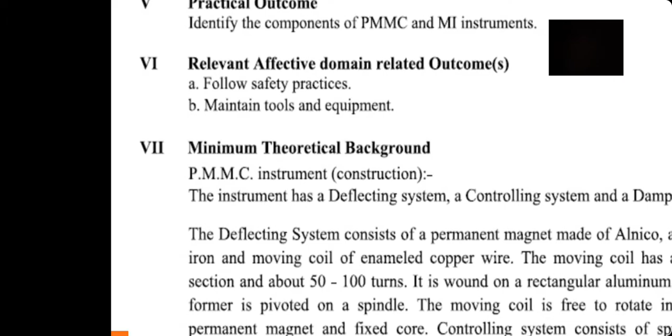Relevant affective domain related outcomes: follow safety practices, maintain tools and equipment. Minimum theoretical background for this practical: PMMC instrument construction. The instrument has a deflecting system, controlling system and damping system.

The deflecting system consists of a permanent magnet made of alnico, a core of soft iron and a moving coil of enameled copper wire. Okay, the deflecting system consists of a permanent magnet made of alnico, a core of soft iron and a moving coil of enameled copper wire. The moving coil has a thin cross section and about 50 to 100 turns.

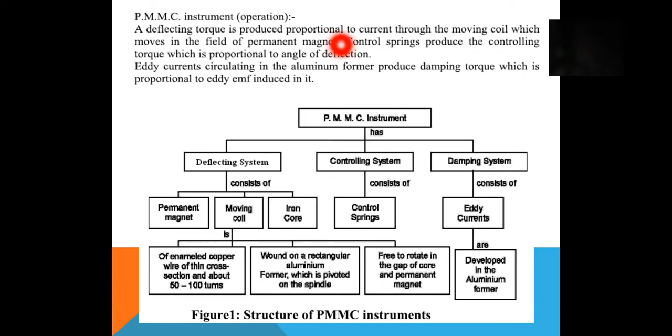Okay, this is the minimum theoretical background for the permanent magnet moving coil instrument. Now, permanent magnet moving coil instrument operation: a deflecting torque is produced proportional to the current through the moving coil, which moves in the field of the permanent magnet.

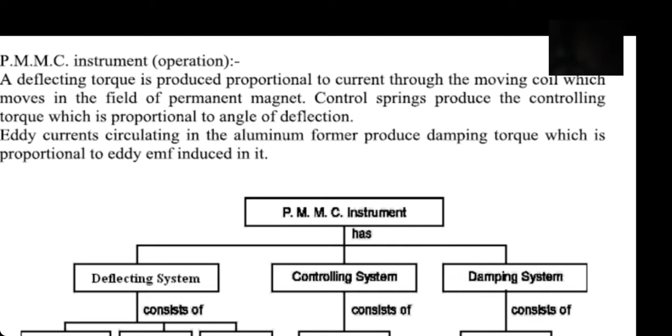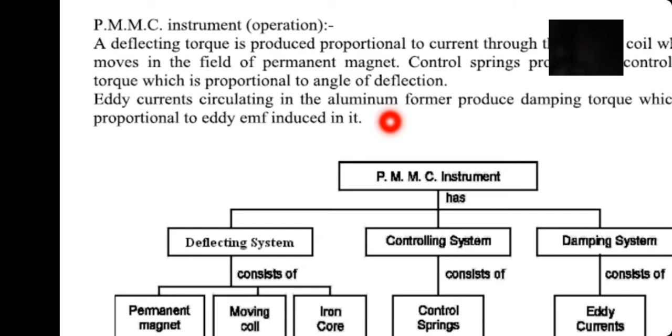Control springs produce the controlling torque, which is proportional to the angle of deflection. Eddy currents circulating in the aluminum former produce damping torque, which is proportional to the eddy EMF induced in it. Okay, this is the permanent magnet moving coil instrument having deflecting system, controlling system and damping system.

The deflecting system consists of three components: permanent magnet, moving coil, and iron core. In the controlling system, the control spring component is included. The damping system consists of eddy currents.

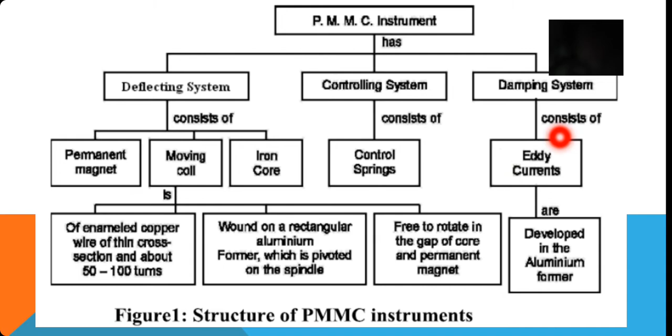Again, the moving coil is of enameled copper wire of thin cross section and about 50 to 100 turns, wound on a rectangular aluminum former which is pivoted on the spindle, free to rotate in the gap of core and permanent magnet. And eddy currents are developed in the aluminum former. Figure 1, structure of PMMC instrument.

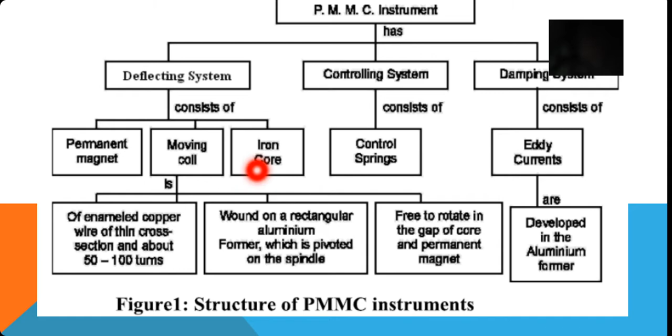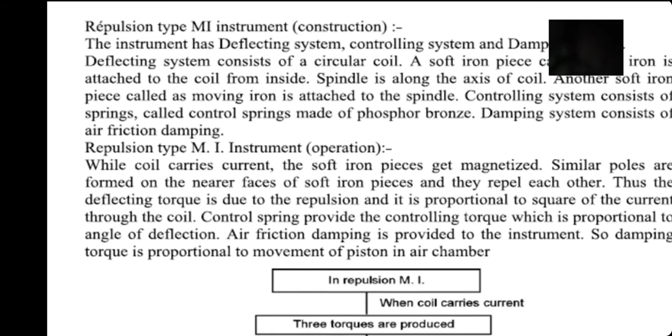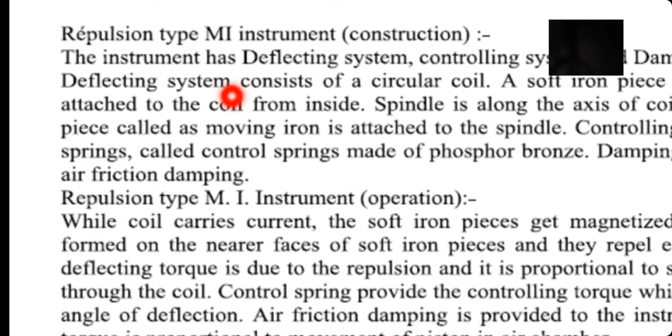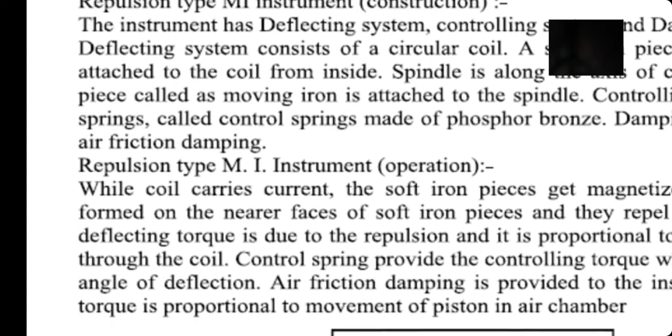Repulsion type MI instrument. Okay, repulsion type MI instruments construction. The instrument has deflecting system, controlling system and damping system. Deflecting system consists of a circular coil. A soft iron piece called fixed iron is attached to the coil from inside. Spindle is along the axis of coil. Another soft iron piece called as moving iron is attached to the spindle.

Controlling system consists of spring called control spring made of phosphor bronze. Damping system consists of air friction damping. Repulsion type MI instruments operation. While coil carries current, the soft iron pieces get magnetized. Similar poles are formed on the nearer faces of soft iron pieces and they repel each other.

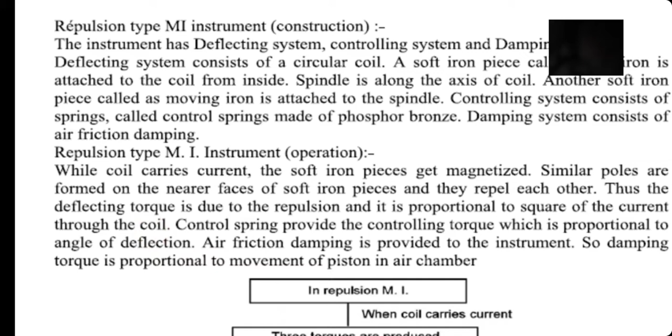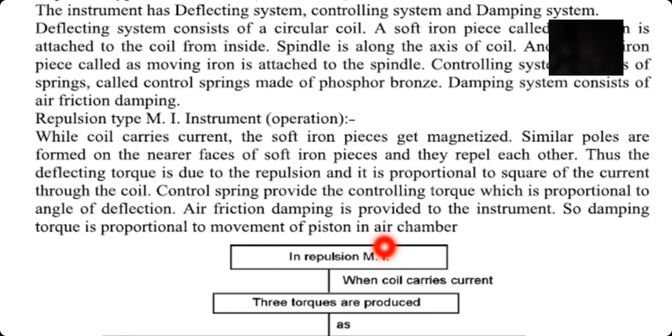Thus, the deflecting torque is due to the repulsion and it is proportional to square of the current through the coil. Okay. Control spring provides the controlling torque which is proportional to angle of deflection. Air friction damping is provided to the instrument, so damping torque is proportional to movement of piston in the chamber. Okay.

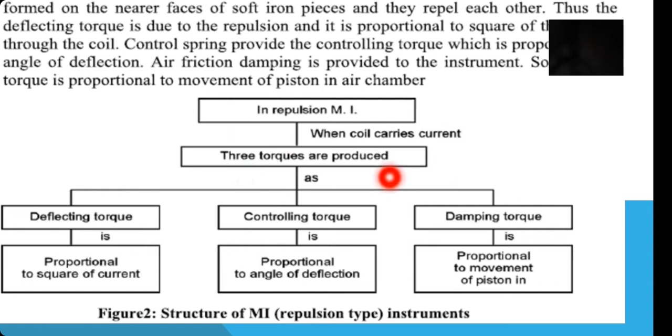In repulsion MI, when coil carries current, then three torques are produced as deflecting torque, controlling torque, damping torque. Okay. Now deflecting torque is proportional to square of the current. Controlling torque is proportional to angle of deflection. Damping torque is proportional to movement of piston in chamber.

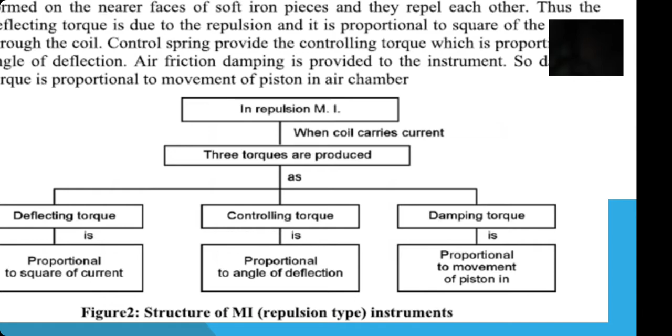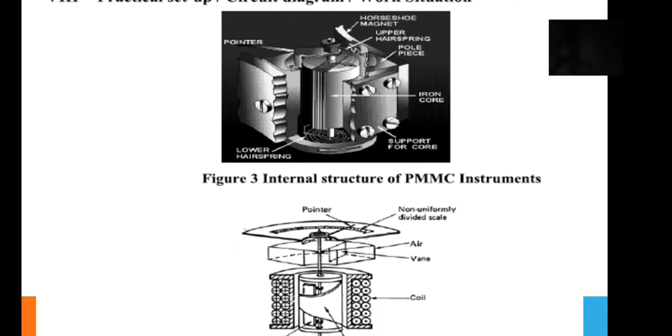Okay, figure 2, structure of moving iron repulsion type instrument. We can see here practical setup, circuit diagram, work situation. Okay, figure 3, internal structure of PMMC instruments.

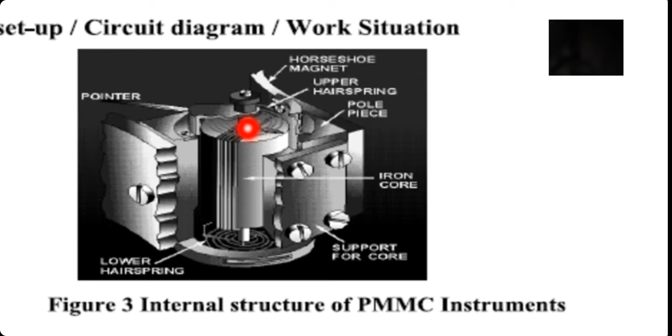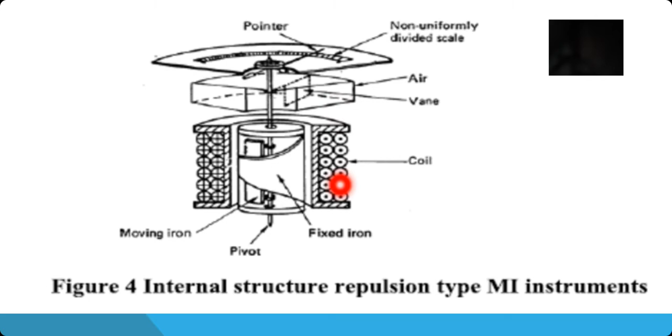Non-uniformly divided scale. This is the non-uniformly divided scale. Air vane to produce damping torque. Coil, okay, coil is wound and iron is moving in MI instrument. Okay.

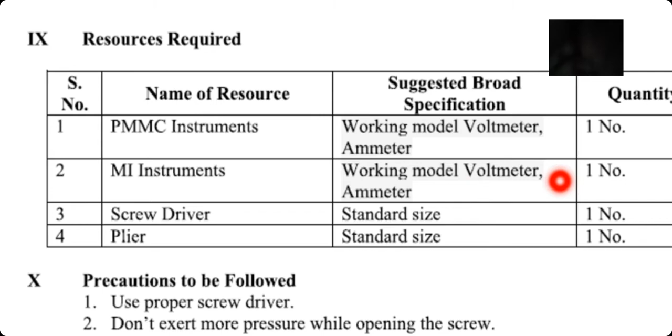Now conducting for this practical, resources required: PMMC instruments working model voltmeter ammeter quantity 1, MI instruments working model voltmeter ammeter quantity 1, screwdriver standard size, plier standard size number 1. Precautions to be followed: use a proper screwdriver, don't exert more pressure while opening the screw.

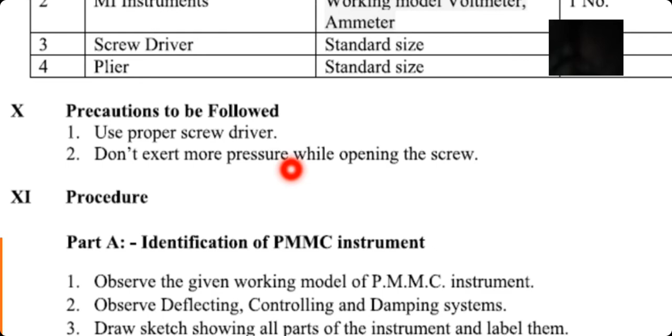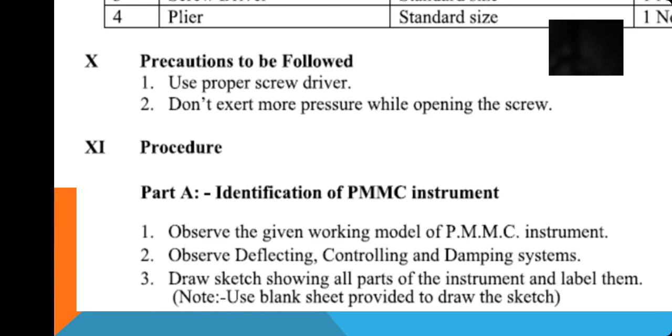Okay, procedure. Part A, identification of permanent magnet moving coil instrument. Observe the given working model of PMMC instruments. Observe deflecting, controlling and damping system. Draw sketch showing all parts of the instruments and label them. Note, use blank sheet provided to draw the sketch. Okay, this is the procedure of part A, identification of permanent magnet moving coil instrument, PMMC instruments.

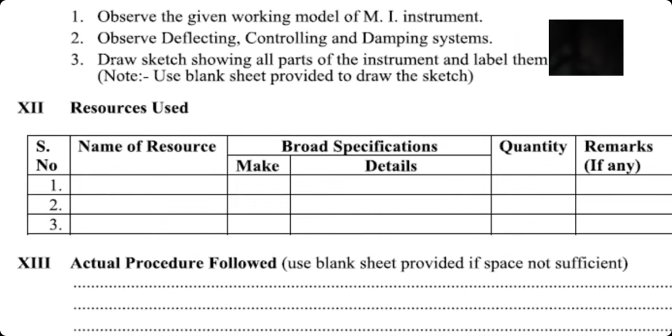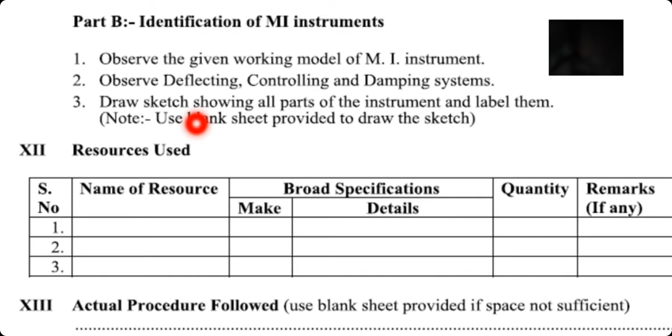Okay, and this is the part B of practical, identification of MI instrument. Observe the given working model of MI instrument. Observe deflecting, controlling and damping system. Draw sketch showing all parts of the instruments and label them. Okay, here is the resources used.

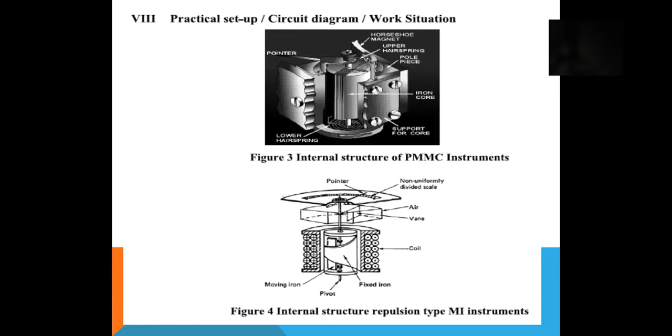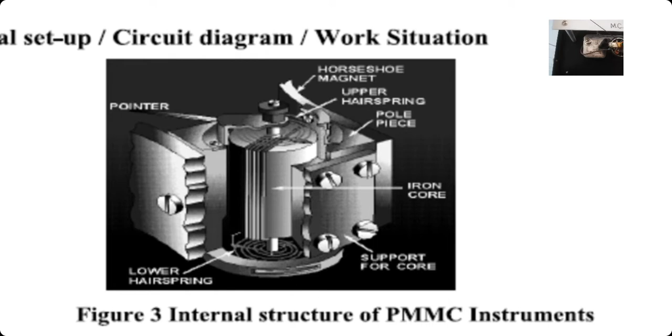Internal structure of PMMC instrument and internal structure of MI instruments we are going to see, and we are going to identify the components of PMMC and MI instruments. Okay. I have one PMMC instrument, a voltmeter. I am going to show you, see in the video. Okay.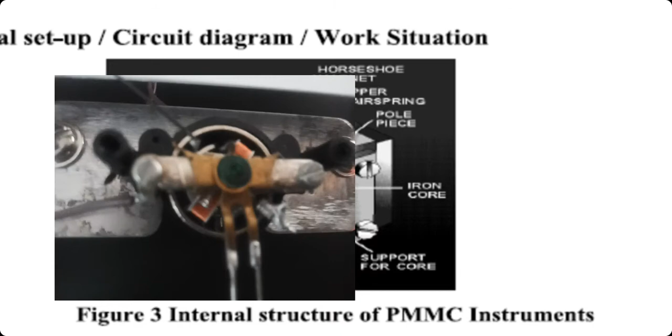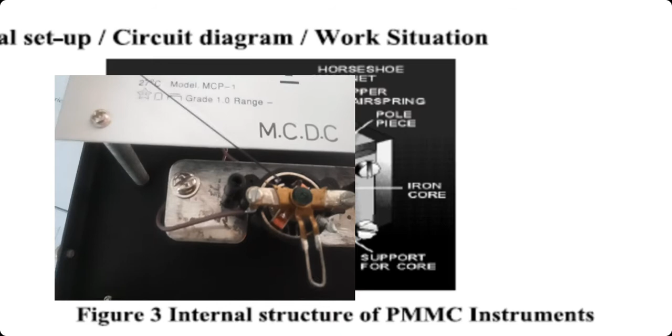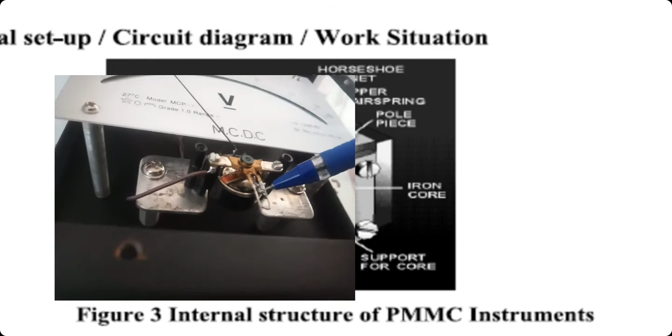Here we can see this is a permanent magnet moving coil. It is a DC voltmeter. Okay, in the video I will try to show you. Here we can see this is the moving coil, and this is the permanent magnet inside of this aluminum former. Inside of this aluminum former is the permanent magnet, and this is the moving coil.

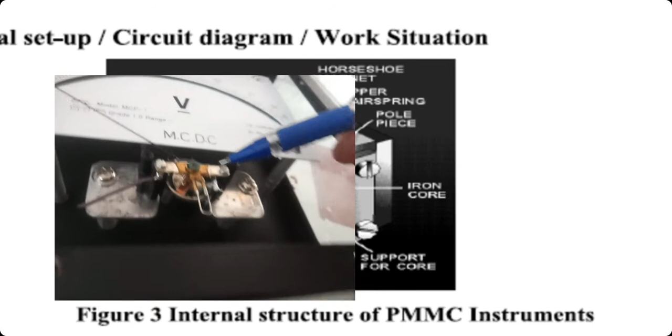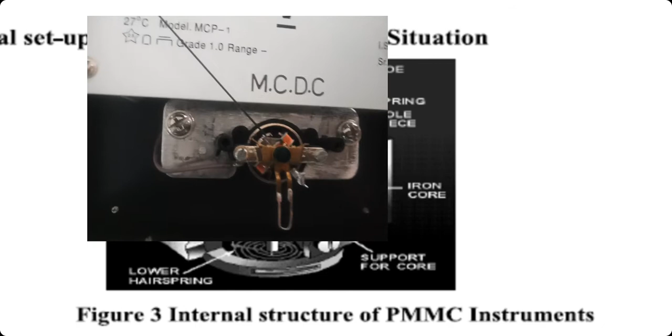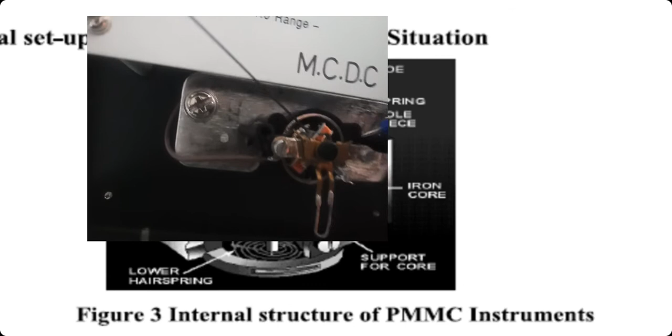In this way the coil is mounted on the aluminum former, soft iron piece, and here we can see the upper hair spring, and on the lower side we can see the spring. Springs act to provide control torque to the pointer. And this is the pointer. This is the moving coil, and this is for zero adjustment; the zero correction point is given here. I will try to show you adjusting the pointer to the zero position.

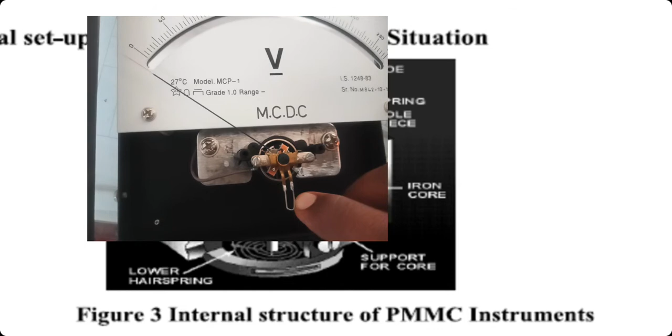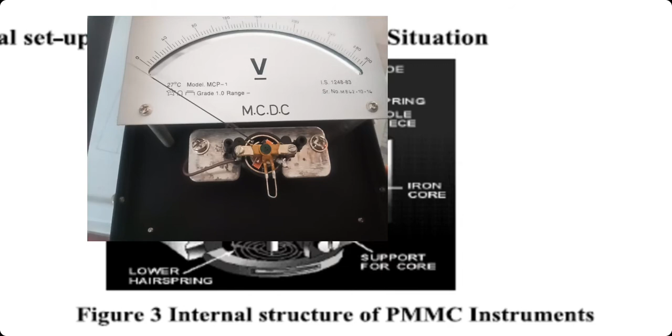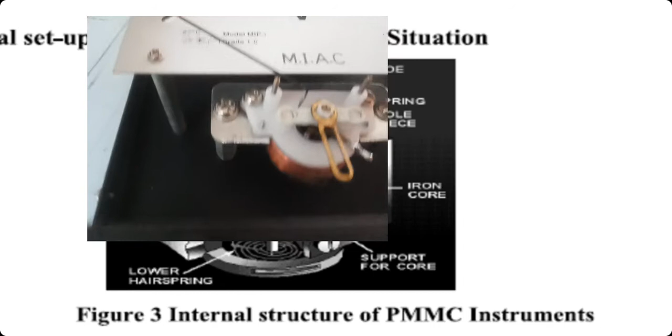Now I have another instrument, a moving iron instrument. I will try to show you here. This is the moving iron instrument. In this structure the coil is fixed and the iron is moving. Here at the top the spring is provided for controlling torque purpose. This is the spring, phosphor spring. Okay, this is the spring.

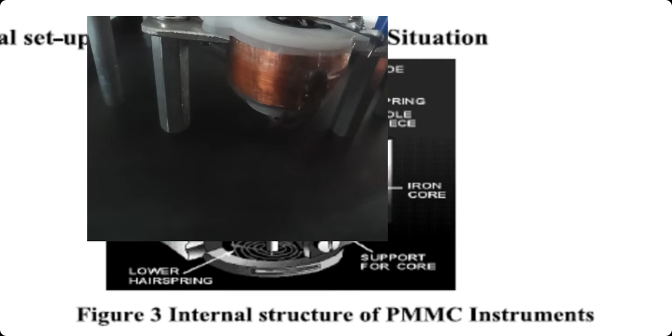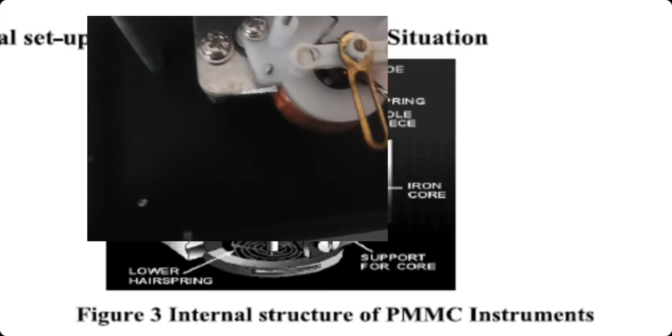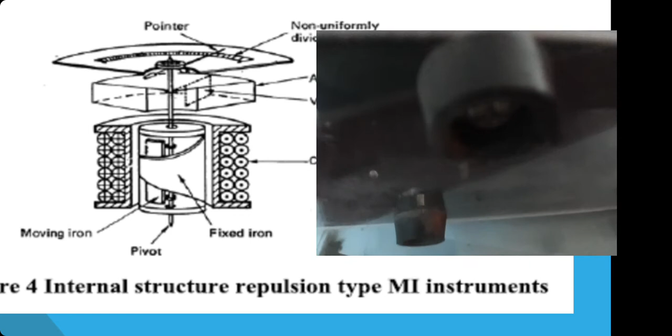And this is the part of the coil. The fixed coil is wound on a frame, and this is the moving iron. When the current is passed through the coil, two similar poles are formed with the moving iron. Here we can see the coil is on the outer side, and on the inner side the fixed iron and moving iron are given.

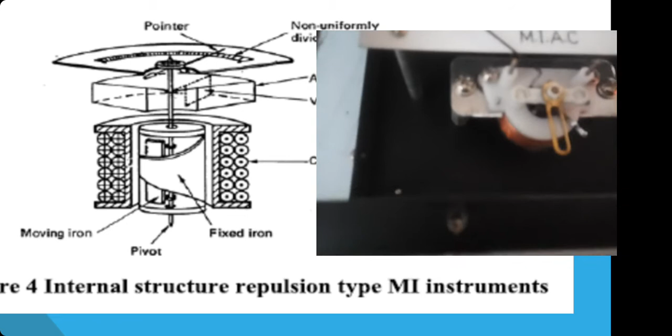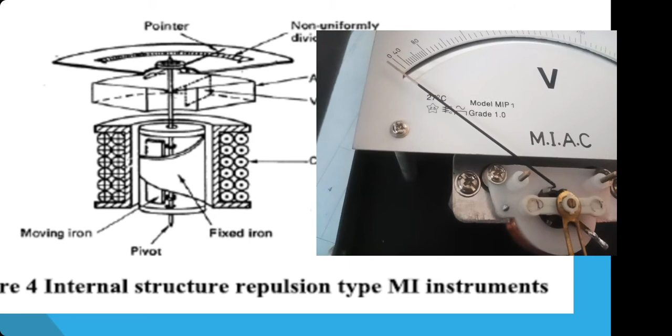And this is the spindle. All the mechanism is mounted on the spindle, and this is the pointer. Here we can see. These are the two instruments. I have shown you the internal structure of permanent magnet and moving iron instruments.

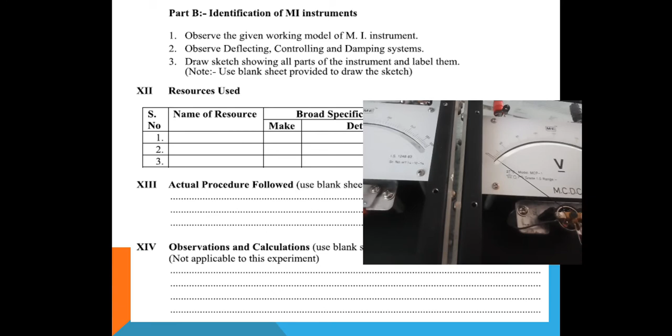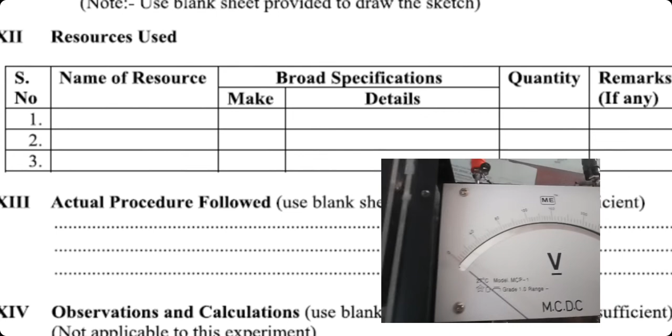So in this way we can write here resources used: voltmeter, PMMC voltmeter. Make of these instruments: ME instruments, Mahesh Electrical Instruments. Details of these instruments: 230 volt DC voltmeter.

Details of these instruments are given on the dial. The white portion is the dial; on the dial there is a scale. You can see here model, grade, and operating position. This is the symbol for permanent magnet moving coil, and this is the symbol for testing voltage: star 2.5 means 2.5 kilovolt. We saw this detail in experiment number 1, and quantity and remarks if any we can write here.

In this way experiment number 2 is conducted, अशा पद्धतीने एक्सपेरिमेंट नंबर 2 आपण कंडक्ट केलेला आहे.